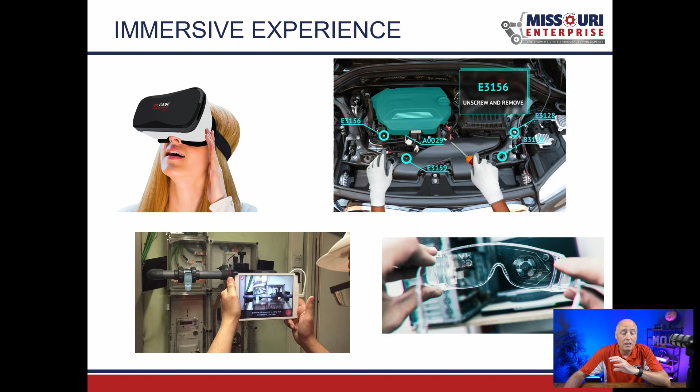Imagine Google glasses, they were big a few years ago. Now imagine a pair of safety glasses with a camera built in, and a technician needs to work on an engine. He puts on these glasses, says, I'm going to work on this model of a vehicle, and it tells them, okay, if you're going to change this part, unscrew E3156. So it uses the glasses to show you exactly what you need to do.

Big data. In the past, we didn't collect a lot of data. Manufacturers didn't collect a lot of data, except if you were maybe in a medical field. But if you want to collect information like the temperatures, the humidities, who worked on what part, where the supplies come from, you can gather all that data now and store it because storage is cheap. And it's very easy to put sensors on things so you can gather that information.

So years from now, you start having problems with a product that you sent out the door, and you can do some research and say, hey, you know what? When the humidity was over this or below this, we had problems with the paint. So then you can go back and figure out which parts you made, what day, what serial numbers you made and had that problem, and you can be preemptive and solve it.

Cobots, robots, we're going to be talking about that today. Two very important things I want you to listen to today about the cobots and robots. First of all, look at that picture. There's no guarding around that robot. In the past, when you would go into a factory, there'd be a robot, there would be guards, there'd be cages around these things because they could literally kill you because they're such big, heavy equipment. That isn't the case anymore. You can work right next to a person.

The second thing is programming. It used to take weeks, months maybe, to become a good programmer in robots. Now it's very simple to program these cobots. And a nice thing about being simple to program, you can move it from one station to the next very simply. Some of our clients are putting cobots on carts and just moving them around the plant as needed.

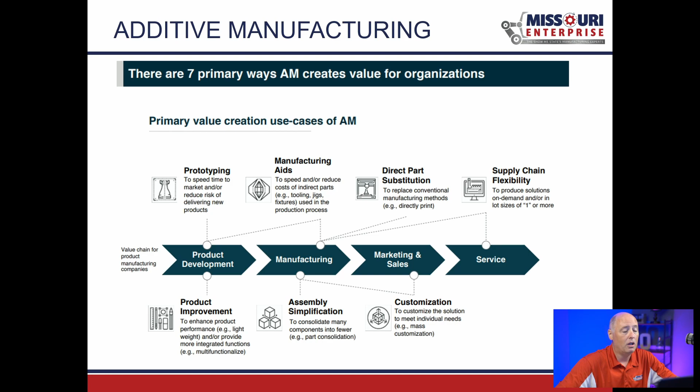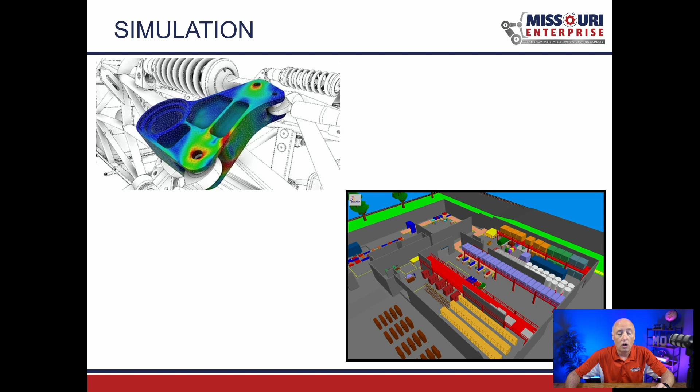Simulation, we're talking things like simulating the plant layout. So you can see how your plant would be different if you laid it out a different way, what that would mean to your production, what that would mean to your plant flow, or even simulation as easily as finite element analysis to see when a part is going to fail.

Cloud computing. This is something that was not really big, and then this thing called a pandemic hit, and people needed to work from home. So they needed to get access to that file that's on the server at the office. How do I do that? Well, now we start using cloud computing. That's simply things like Box and Dropbox and ways to access your information from afar, from a remote location. So you can approve that contract while you're waiting in the airport for your flight. It makes the world a little easier for manufacturing today.

Internet of Things, that's a connected plant. Imagine you have a piece of machinery that does inspections near the end of the line, and it sees that another machine upstream of it is making parts that are a little out of tolerance. So the inspection machine can talk back to the other machine and say, hey, these tolerances are out, move the tool a little bit closer this way, or maybe you need to change the tool. It can also communicate with your maintenance department, say, hey, our cutting fluid's about to wear out.

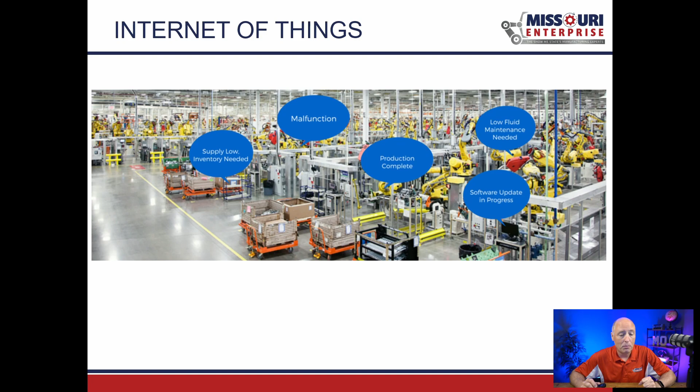So a connected plant is very simple if you can get the machinery to talk to each other, and that's what we can help you with. That's the first major step you need to take.

System integration. This is the ultimate, if you will. A consumer goes onto your website, orders your parts. It talks to your ERP system, MRP system. It schedules the manufacturing. It orders the parts from your suppliers.

It gets the parts made, and as it's being made, it feeds back to the consumer and says, hey, your part is going to be late because a circuit board is not available. Not that that would ever happen, but let's say in this instance a circuit board is unavailable. So now you're saying, okay, Mr. Consumer, your part will be delivered on this date rather than the original scheduled date. And it can even go schedule the truck to deliver it. So this is a complete integrated system, and everything is connected.

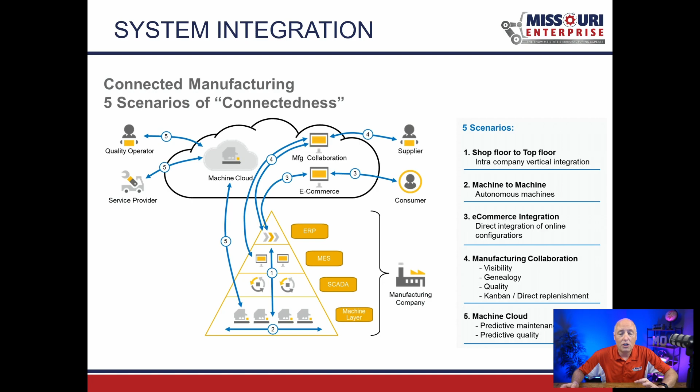And finally, the umbrella that covers it all, the armor to protect it, is cybersecurity. I talk to clients occasionally and they'll say, well, cybersecurity isn't that critical for us because we don't have anything classified, nothing technical we need to guard. For the most part, 99% of the time, cyber criminals are not going after your technical information. They're going after your list of who works for your plant. Imagine what you have on your computer: everybody's name, address, phone number, social security number, and chances are their bank account number because you give direct deposit. That's the kind of information you need to protect, and that's what criminals are trying to get to.

So we can help you with cybersecurity.

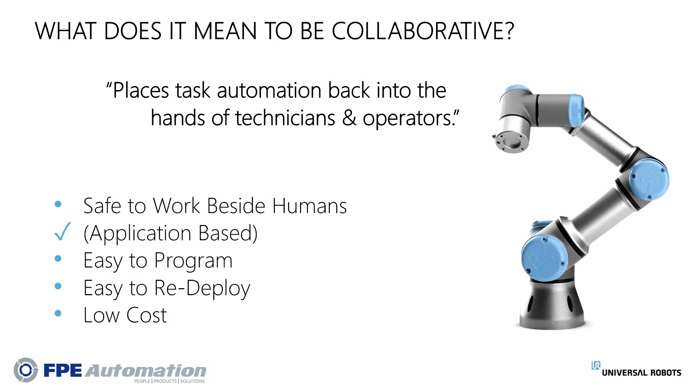Last but not least, it's low cost. All the features I've mentioned above attribute to this, and we typically see a very attractive ROI for these robots. I'll get more into detail with ROI and costs a little later in the presentation.

So my presentation today will be split into two distinct sections. First, I'm going to focus on the why. Why do collaborative robots exist, and why are so many companies moving in this direction? And then second, I'm going to focus on the what. What is the technology and how can it impact your company?

So first off, we understand that things are changing. I think everyone in this meeting can agree that manufacturing is changing very rapidly, and very few of you are doing your processes the exact same way today as you were 10 years ago, or even 5 years ago, or even last year. In this world, we have to adapt to changing work environments to stay competitive, and collaborative robots are a main factor for a lot of people who have chosen to close this manufacturing gap.

I would assume the majority of you watching this webinar do things a little different than the next guy, but I think a commonality would be the high mix, low volume in the manufacturing force. This is something traditional robots do not lend themselves to. Traditional robots are typically built for high mix, or high volume low mix applications, which are more of that fixed type automation you see in automotive and larger manufacturers with that cookie cutter product. They don't lend themselves well to meet the demand for manufacturers with small volume and high changeover, and collaborative robots are really helping fill that gap.

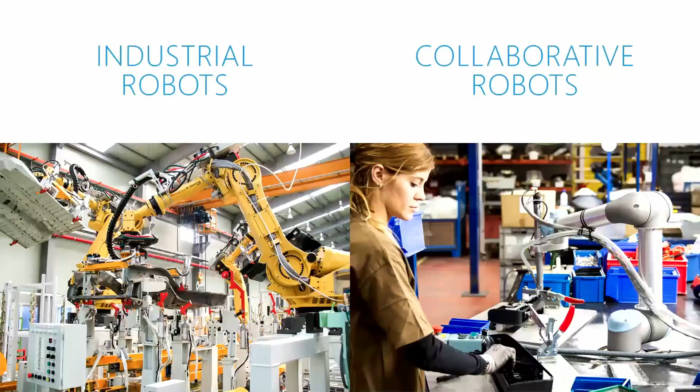So we are also changing the face of manufacturing, and this is how collaborative robots are doing that. Typically when you hear of robot, you think of an industrial robot, similar to the image on the left of the screen. These robots have been around for nearly half a century now, and traditionally only lend themselves to work in fixed automation environments that are doing the exact same thing 24/7, 365 days a year for years on end. This is why industrial robots and collaborative robots do not typically compete with one another.

They each have their own uses in their own respective areas. With that said, there are not a lot of SMEs that manufacture this way. This is why we're seeing a large shift in the amount of manufacturers going to the cobot route, like the image on the right. They can be used in a much smaller environment and used as a tool by your employees to get more out of their 8, 10, maybe 12-hour day. They're really filling that gap that has gone unfilled in the small to medium-sized manufacturing environment for some time now. They can also help set the pace and increase output, because the robot is always going to be waiting on that person - so the quicker the person can do their process, the quicker the robot can go.

So how do the two differ? Manufacturers have been working with industrial robots for a long time, and they certainly have their place, but there are some key points that separate the collaborative counterpart.

Number one would be the difficulty in setup and programming. Industrial robots are a little cumbersome, and you need to be a skilled robot programmer to leverage their full capacity, or have multiple days or even weeks of training under your belt. Universal Robots have changed the game to allow anybody to grab the teach pendant, just like you would a tablet, and put together a simple pick-and-place program on the robot.

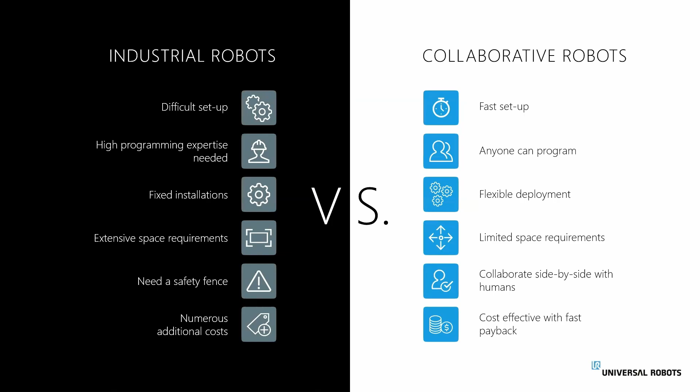Space will open up on your floor because you no longer have to have safety fencing with robots dedicated to a certain area and people dedicated to another. Now you can utilize all of your floor space and have the two really mesh together. And there are also numerous additional costs, which we'll talk about here.

So if we're looking for a 10-kilogram industrial robot versus a 10-kilogram collaborative robot, the costs are relatively close together—there's not much difference between the two. But when you step back and look at the total cost of ownership, you'll see the hidden costs in a traditional system versus a collaborative system.

So we've got the robot hardware, of course, but we also have the end-of-arm tooling. Every robot is sold with a blank wrist, like the one you see on the top right—there's nothing on the end of the arm—and it needs some sort of end-of-arm tool attached to accommodate the application you're trying to automate.

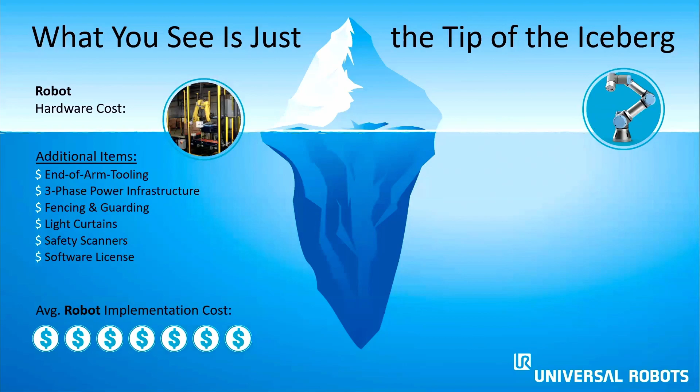There's also different power requirements. Industrial robots generally run off 3-phase power. There are some smaller industrial robots that run off 110, but all collaborative robots run off 110 volt, so you won't need to call an electrician for any drops—and that's an additional cost. Fencing and guarding, light curtains, safety scanners, software licensing—all these things add up to an extremely cumbersome and expensive robot deployment.

With Universal Robots, you do have your hardware, and you also have additional items like end-of-arm tooling that'll be plug and play. Then you have teaching—instead of programming or trying to integrate, depending on the application, you can teach the robot how to do the application you purchased it for.

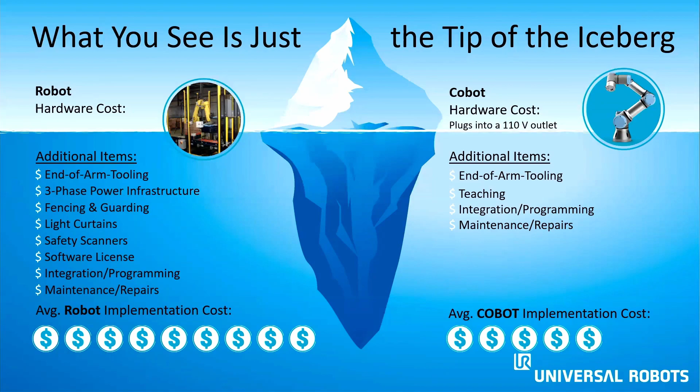Now, in some instances there is integration and programming involved—we typically see around 50%, it just depends on your application, whether it's DIY versus integration programming. Then you have some maintenance and repairs, but there's no grease or anything like that—it's just preventative maintenance, making sure dust doesn't get into the seals of the robot and the control box, and that the vents stay clean.

So now that we've looked at collaborative robots and why people are going that direction, let's see where they're being used. Some of you may have seen collaborative robots on YouTube or at a trade show, but really, how are they being utilized on a factory floor?

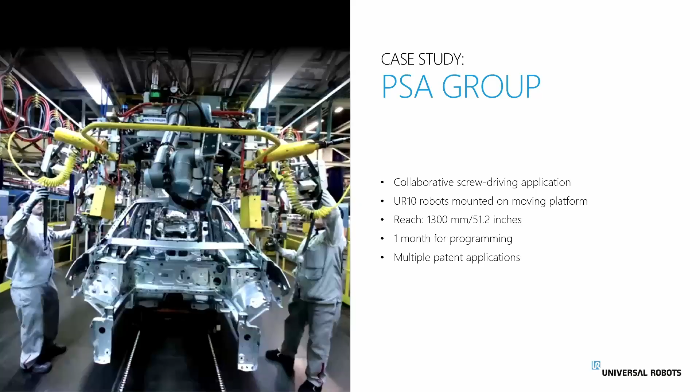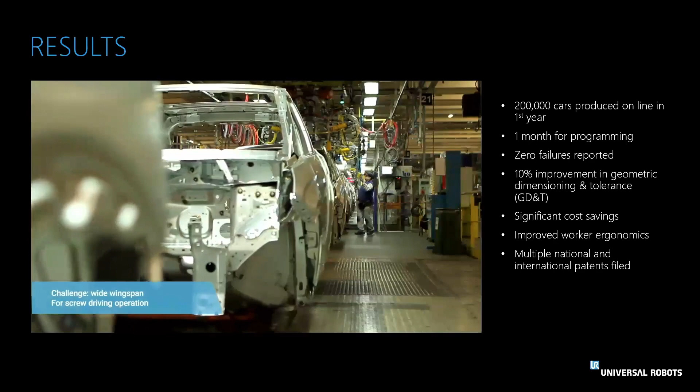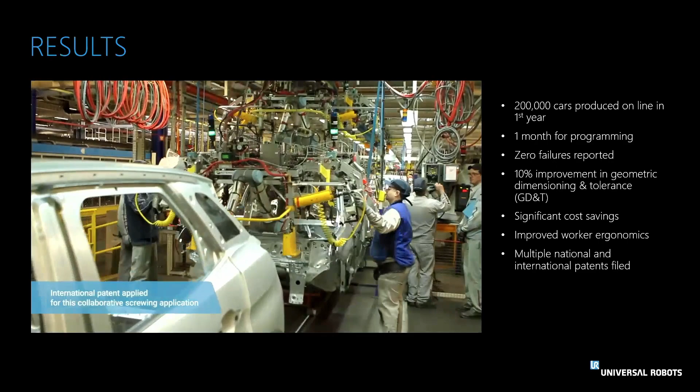Here's a video of an automotive manufacturer using cobots in place of a human who would otherwise be in a manhole or on a creeper all day, screw driving inside that wheel well. Notice how the robot's mounted to an overhead gantry that comes down and locks onto the chassis of the car. By adding a Universal Robot to this application, they not only improved the ergonomics, but also added automation that hits on the 3Ds of automation.

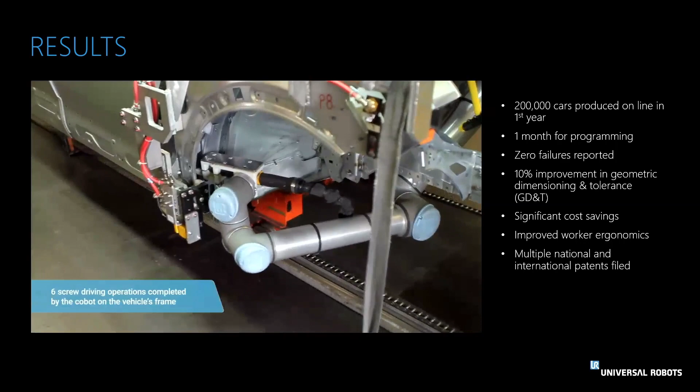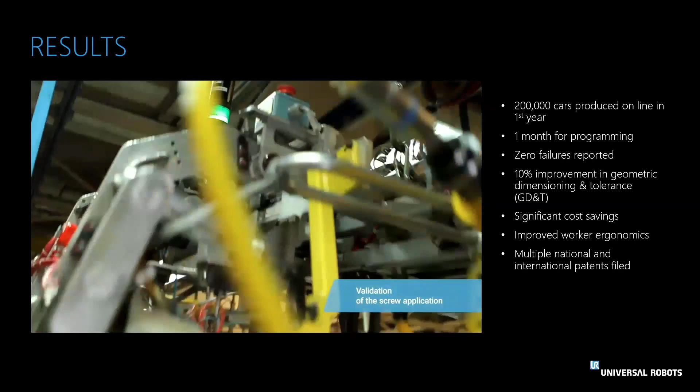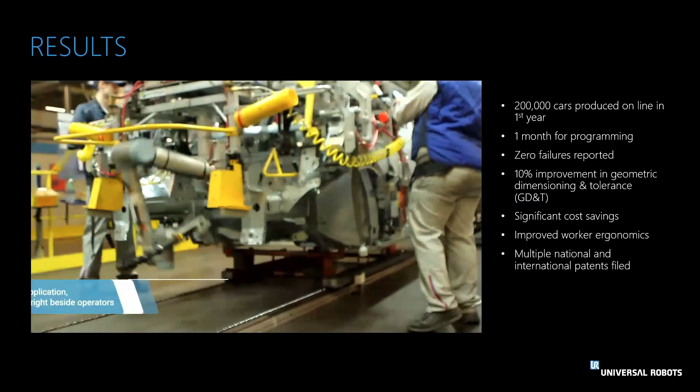When I say 3Ds, this is what we typically look for when we go into a facility, trying to figure out what's the low-hanging fruit to automate. Is the application dull? Very dull. Doing this repetitive task 200,000+ times a year would be taxing on just about anybody. Is it dirty? I think being on a creeper all day, or in a manhole of some sort, could be a very dirty job. And is it dangerous? Yes, it could be extremely dangerous depending on how it's set up for a person to be in there.

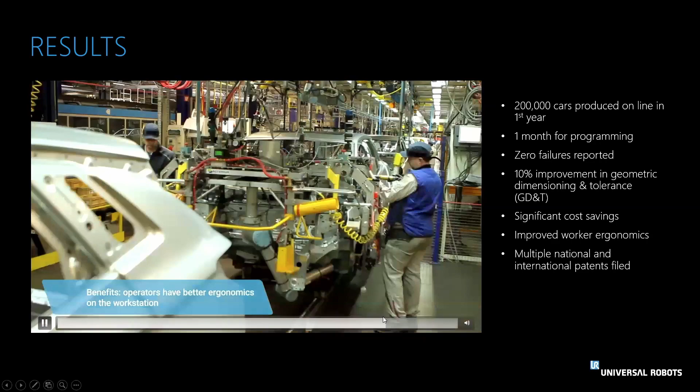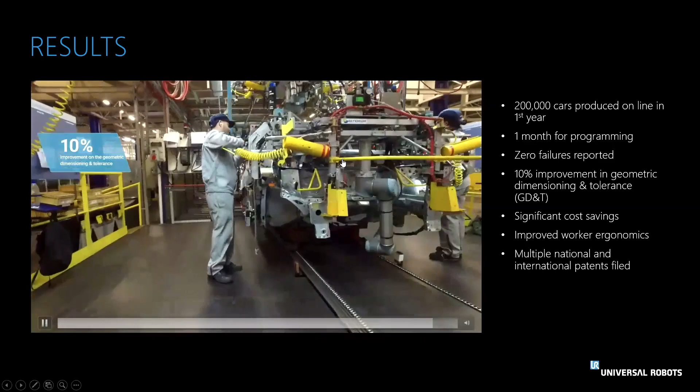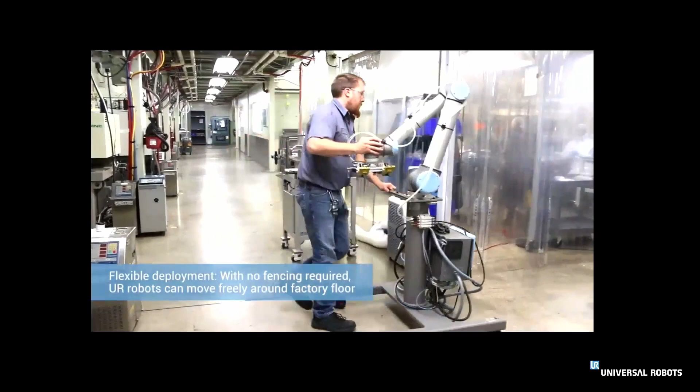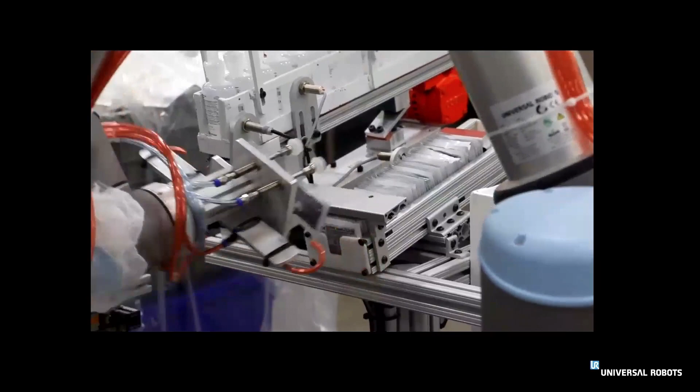This next one highlights some of the things I've mentioned earlier about putting a robot on a cart and moving it around a facility from job to job. Because they're lightweight, the heaviest one's about 75 pounds, they can be moved and mounted almost anywhere. Dynamic Group has really taken advantage of that. They're a contract manufacturer out of Minnesota, and they've mounted a UR on rolling carts and move it from one process to the other just as demand dictates.

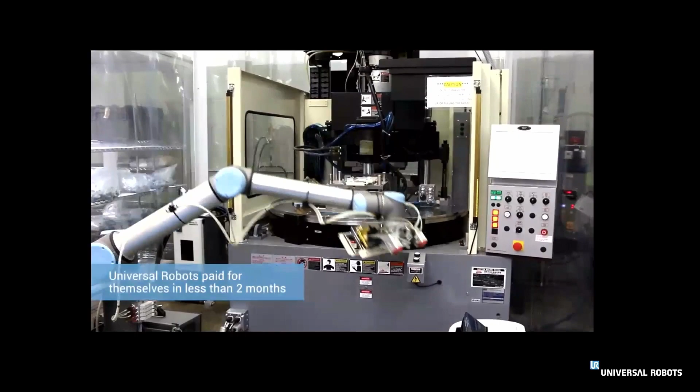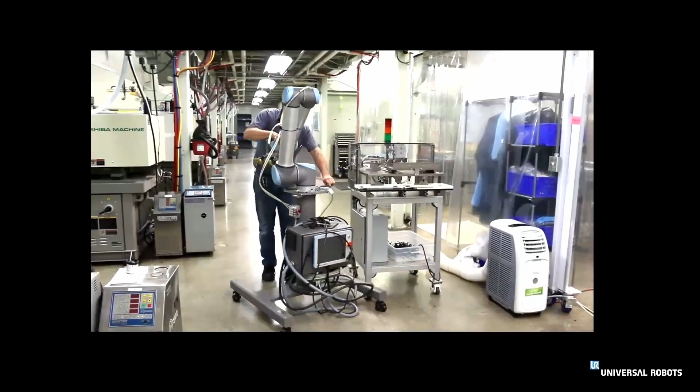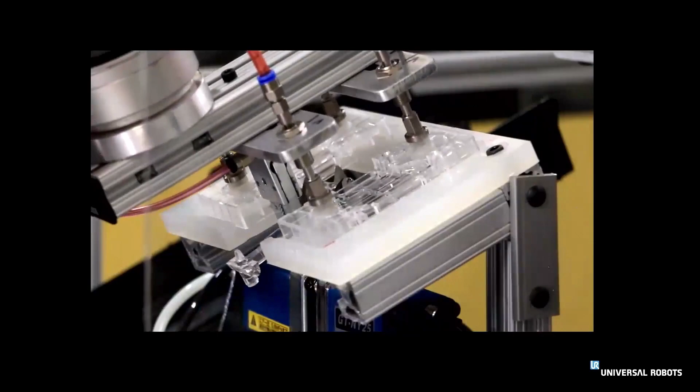In this case, it's going from a kitting application to tending an injection molding machine to a degating application. This flexible deployment supports agile manufacturing and demands for high mix, low volume, and custom processes. You can easily move, redeploy, and adapt them to new processes or product lines with easy programming and a full ecosystem of peripherals that we'll get into in a little bit to support almost any application.

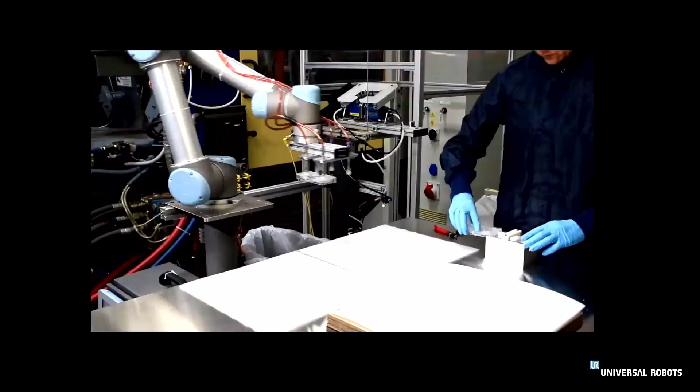You can also save programs to reuse if you have cyclical demand, and most processes are order-based. But if you have one that only runs every 3 months, every month, or even every 6 months, the program is always going to be in that controller, and you'll always be able to pull it up and restart it within a matter of minutes.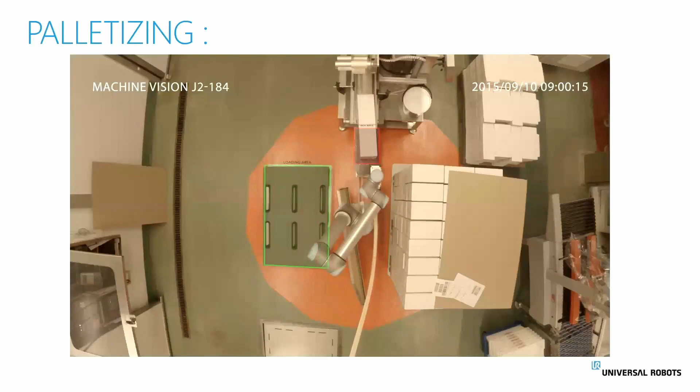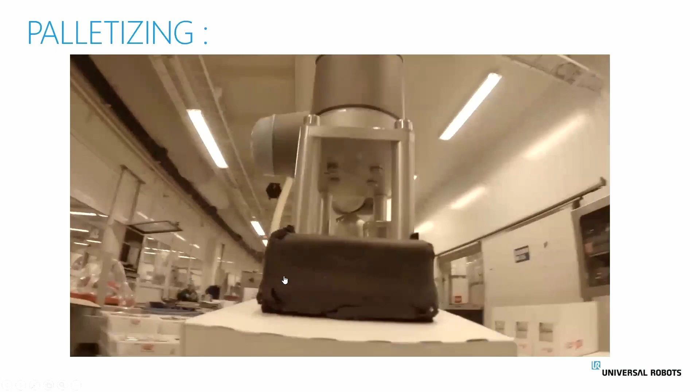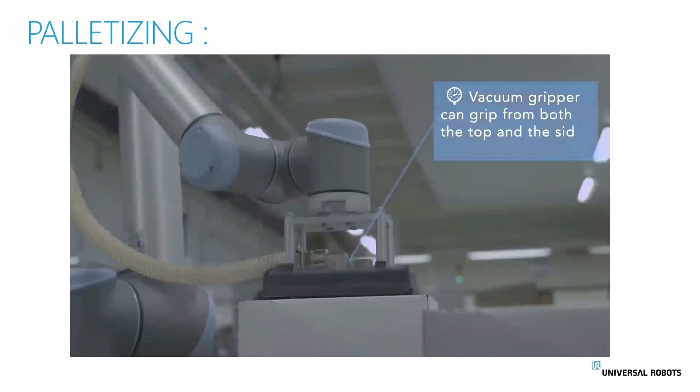One of the UR Plus partners, Robotiq, makes an entire system with a 7th axis. This particular one doesn't show the robot on a 7th axis, it's a fixed base. But what I mean by 7th axis is a pillar that lifts up and allows you to stack your boxes, say, 80 to 95 inches tall, so you can completely repurpose a person who would otherwise be doing this all day long.

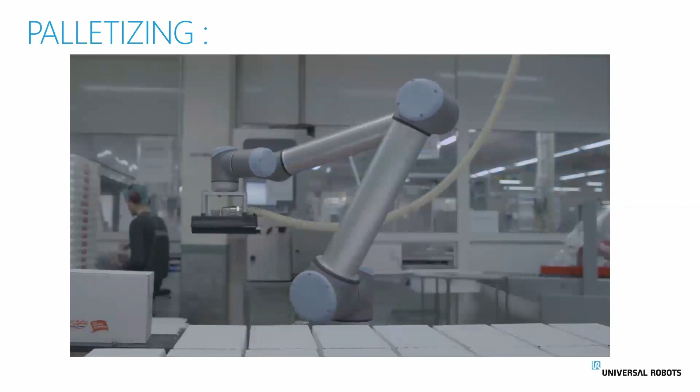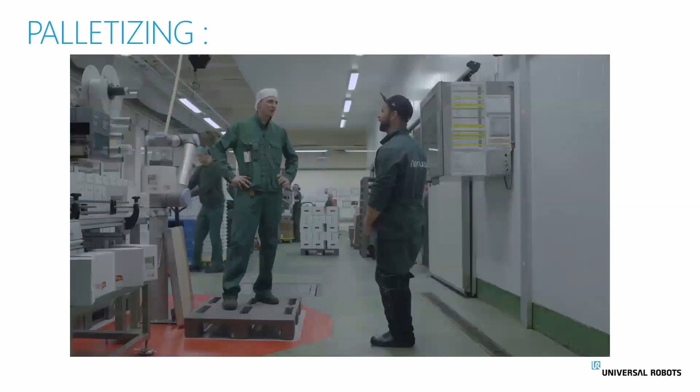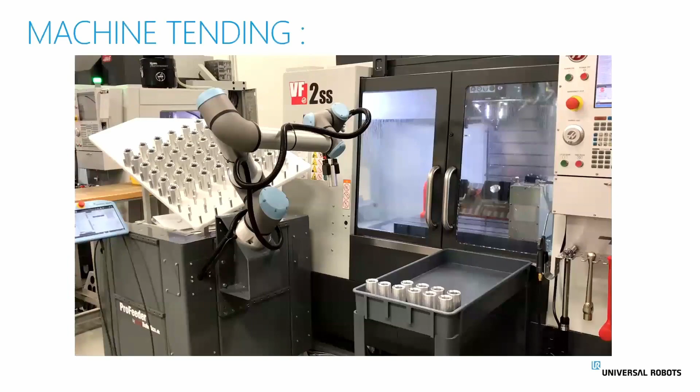And then we have machine tending. This is another really popular application with a really good ROI, averaging around 10 to 12 months. As you can see in this video, there's a couple different things going on.

The robot is opening and closing the door. We can do this a number of different ways: with an auto door opener, which is fairly expensive, or by adding a pneumatic cylinder to the door, having the robot send a signal to open and close it when the process in the machine is done. You can also see this robot has little grippers to help increase cycle time.

It'll grab the blank and have it ready, and once the part has been cut, it'll pull the cut part and place the blank without having to go back and pick a new one, then close the door. In some of these applications, the robot is actually pressing the start or cycle start button, just like a human would.

Yeah, it is. So you can also see that it's on a stand called a ProFeeder. It's a mobile stand that you can lock in, either to your machine or into the floor, and it's got that pegboard type thing sitting on a 45-degree angle. This is nice if you have multiple different parts, which most customers do. You can switch the pegs out to hold different parts and use this for multiple different applications, not just one specific part.

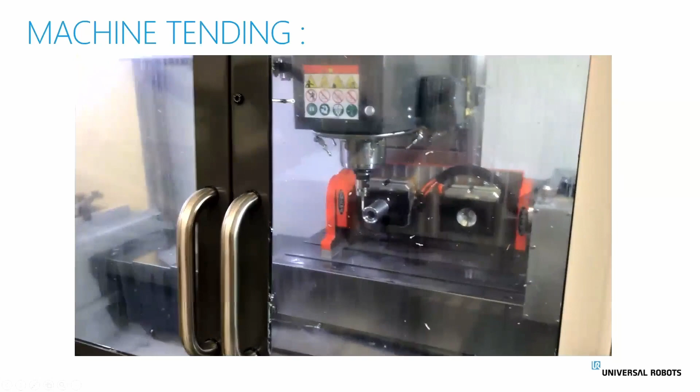That's kind of just going to show it waiting now, but the next one is quality inspection. So I'm going to be quiet for a little bit and let you watch this whole case study here.

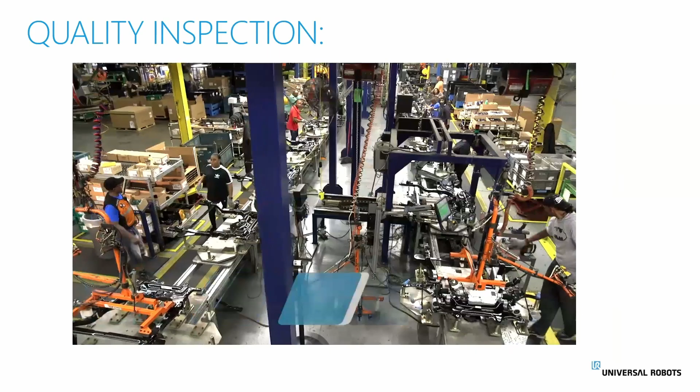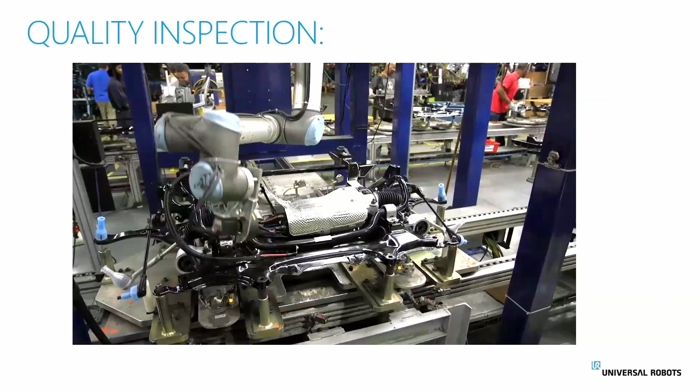Comprehensive Logistics is the number 1 logistics and contract manufacturing provider to two of North America's largest automotive enterprises. The Ohio-based company runs fast-paced suspension, powertrain, and interior component assembly lines, leaving no room for error. Our customers speak quality constantly, and when they come to us, we speak the same language. Everything is just in time, just in sequence, and that's what we do as a company.

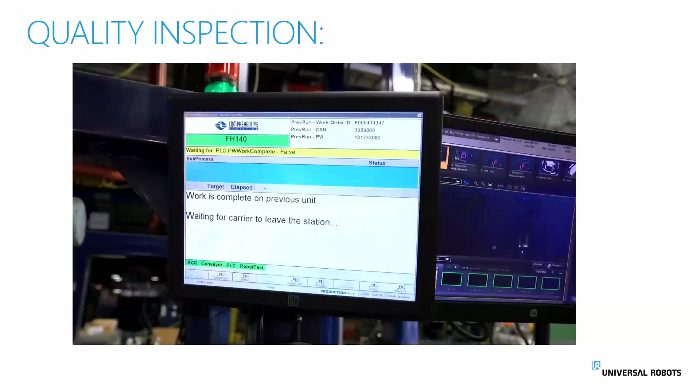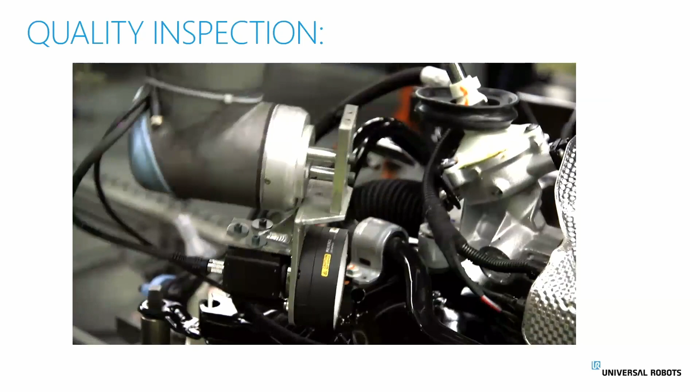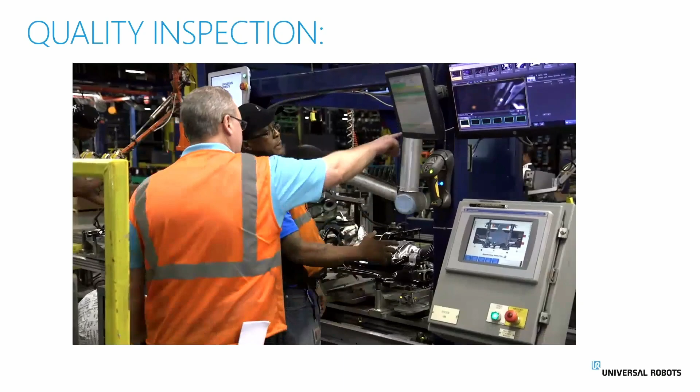Comprehensive Logistics has one subassembly operation where the final check of quality required us to validate that an electrical connector was locked in position. We had a system in place before with stationary cameras that served a purpose, but they couldn't get into some tight spots. They weren't nearly as repeatable.

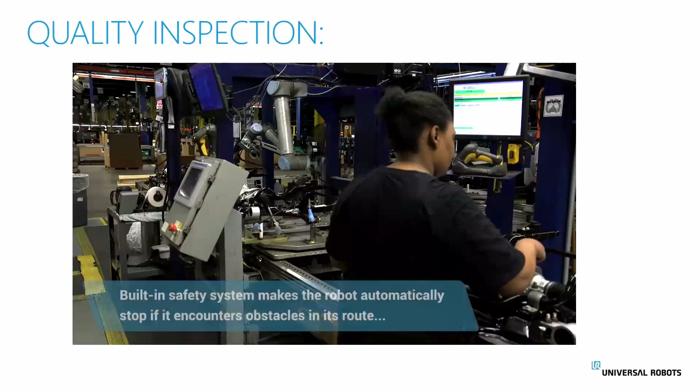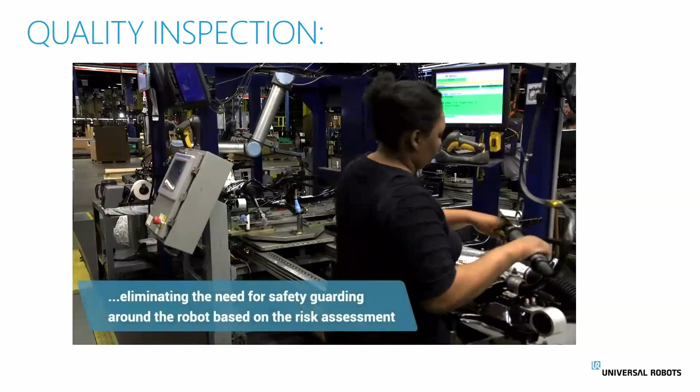Universal Robot because it gave us a personalized system. It was a lightweight system that interacted well with humans. We didn't need to have the cumbersome light curtains that are required with some of the standard robotic systems in the industry. The inspection, if done by a human, is about 80% efficient, so Universal Robot provided us the opportunity to strongly position ourselves and get 100% quality.

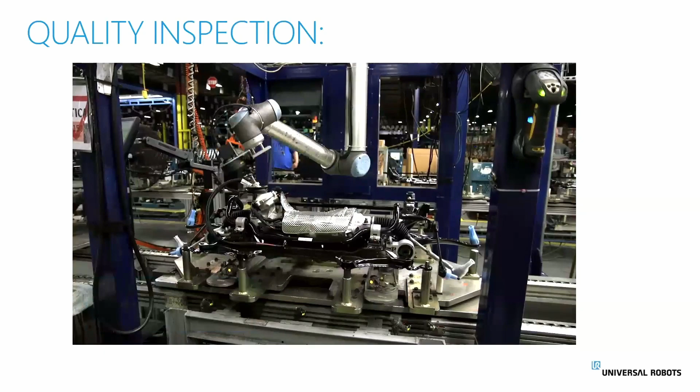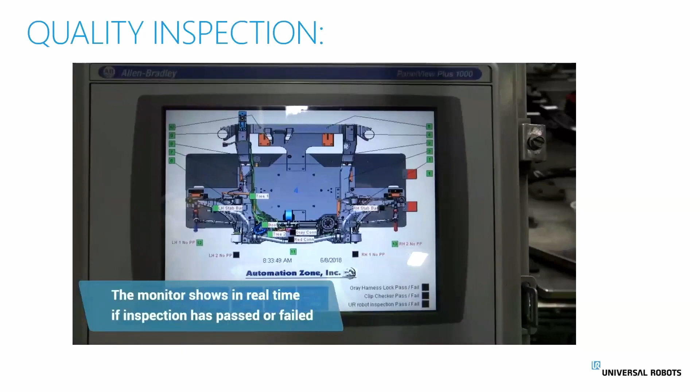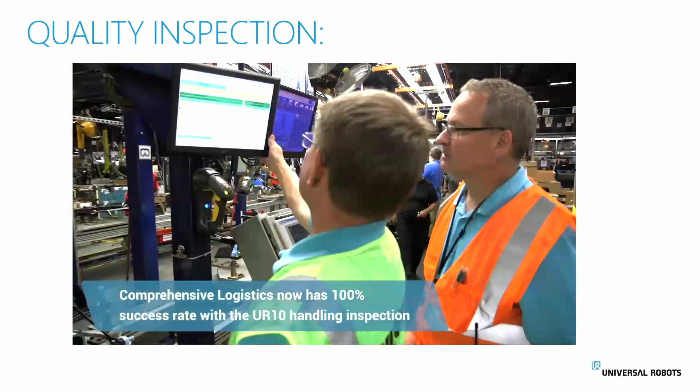The dexterity of the Universal Robot is such that it can get pretty much anywhere on that assembly that we need to get. There are two plugins for the wire harness, and they have two locking devices. If there is an intermittent connection, or it's not connected and locked into place, it is a loss of power steering, which puts the operator of the vehicle in danger. It's a life-threatening failure mode, so we need to make sure 100% of the time that those clips are locked.

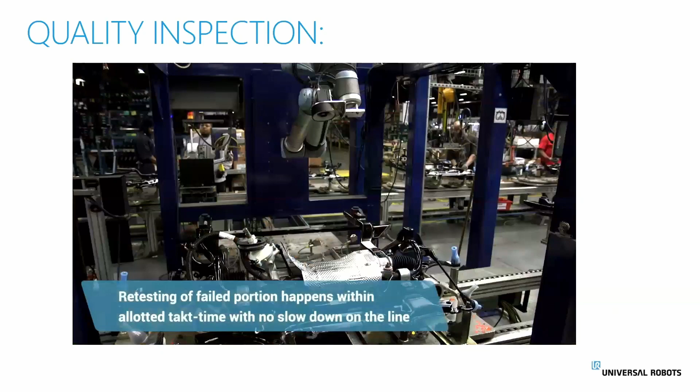If the inspection fails, you are able to interact with the Universal Robot and go in and fix the issue. The return on investment is probably about 7 months. We had a turnkey operation that obviously had an integrator included. The payback for the hardware for Universal Robots in itself would probably be less than 4 months.

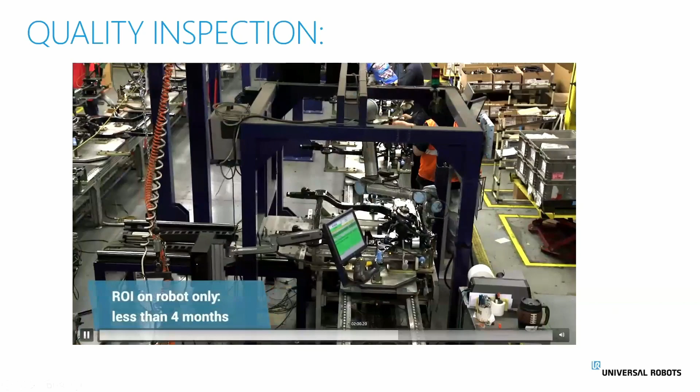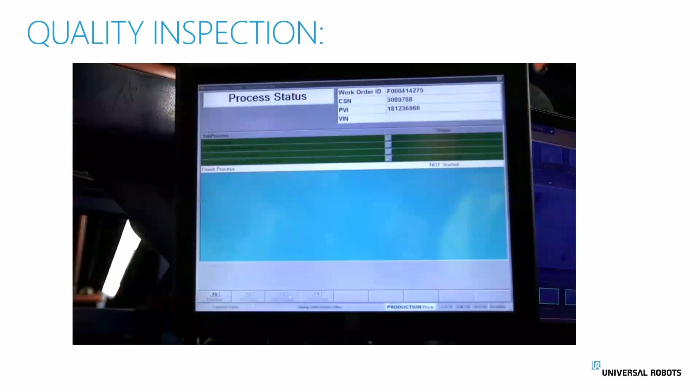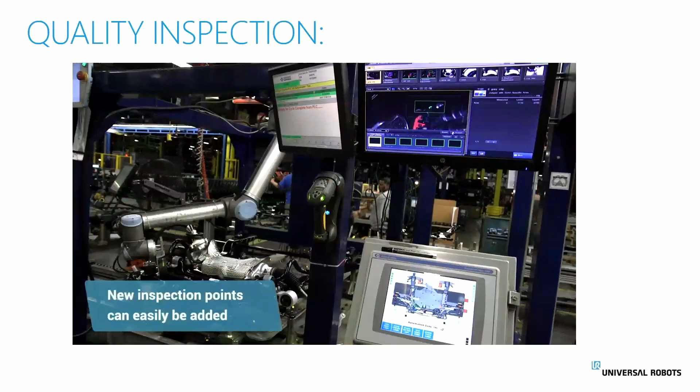We have not had any issues with the robot since its implementation, aside from possibly adjusting some of the images on the camera, unrelated to the programming of the robot. The Universal Robot provides Comprehensive Logistics real-time, quick-change ability. If new requirements were given to us by our customer, or different inspection criteria, it's very easy to add inspection points to the process.

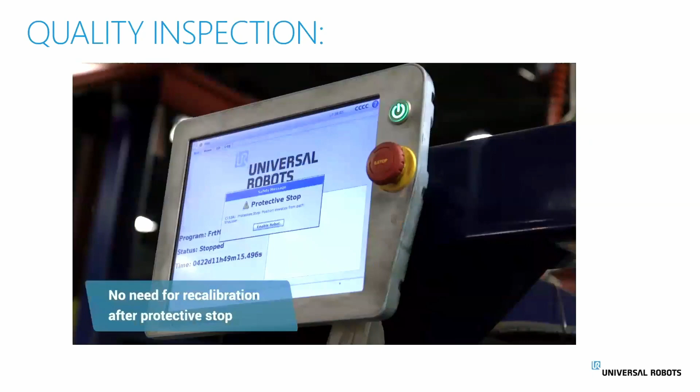If we lose power in the facility or there's some blip, even if it's interrupted by human interaction, you basically just need to reinitiate the robot and start it, and it continues from its stopping process. We could potentially replicate this process on other lines if the customer has mission-critical inspection points that need to be 100% quality.

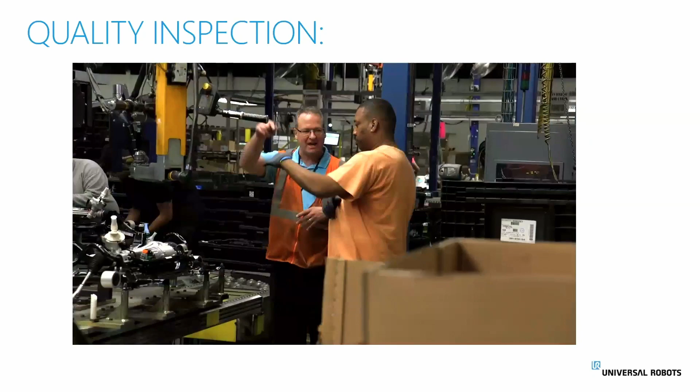It's like family. It's here before I am, during the day, and it's here when I leave. So, I mean, it's a part of the system. We just take the robot on as another employee, basically.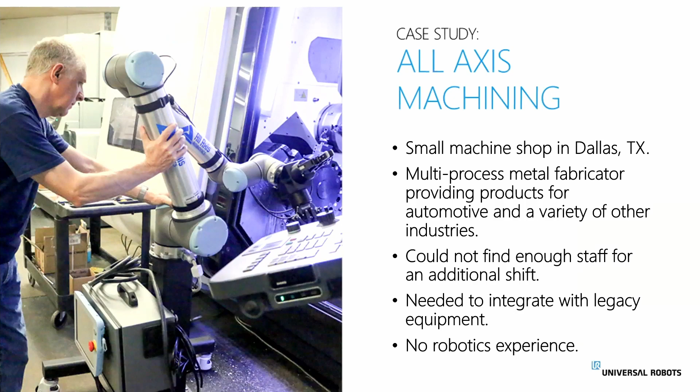So now that you've seen some of the videos and case studies, I wanted to talk through a quick example of a small company in Dallas that has had great success with Universal Robots. They were having issues with finding and retaining staff, like I would assume most of you are. This was causing them unnecessary downtime and having to turn down work due to staffing issues. With no robotic programmer on staff, they were able to get trained through the Universal Robots Academy, which I'll explain here in a little bit, and automate their first job within 2.5 months.

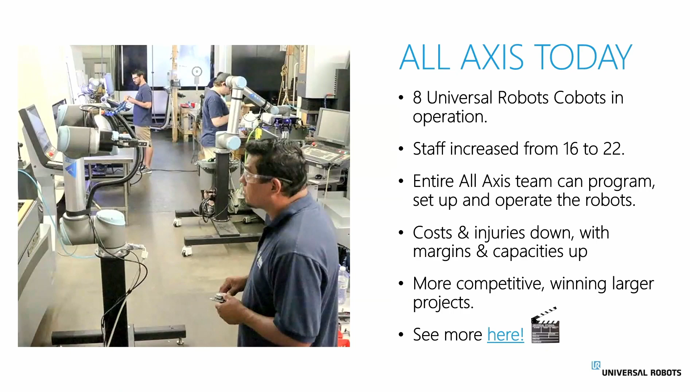This gave them a 60% increase with a 4-month ROI, and it also increased their spindle up time from 8 to 20 hours a day. Today, they have a total of 8 Universal Robots in operation and increased staff from 16 to 22 people. The entire team is trained on how to program and make small changes to the robot. Not only that, they are more competitive and now winning larger projects because of what they've decided to automate and how they've decided to move forward with business.

So robots versus labor. The question is, are robots taking everyone's jobs? The reality is it's not in the slightest the truth. We go into a number of different manufacturing facilities daily, and they can't find enough people for the jobs. So it's really becoming a necessity for companies to fill these positions with robots because they can't find enough people to do it, and they still have to operate on a day-to-day basis.

In a recent study, executives reported that they cannot even fill higher paid entry-level production positions, let alone find retained skilled workers for specialized roles. It's looking like it'll be a long-term challenge for about 77% of manufacturers trying to find and retain workers in 2021 and beyond.

Everything I'm currently going over was already an issue before the pandemic, and it's since worsened. The hard data states that about 1.4 million U.S. manufacturing jobs were lost during the early days of the pandemic, setting back the manufacturing labor force by more than a decade. While the manufacturing industry recouped 63% of jobs lost during the pandemic, the remaining 570,000 had not been added back by the end of last year.

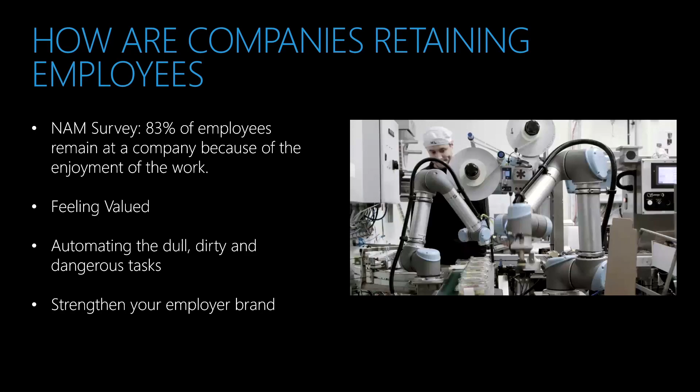75% of job seekers say that an employer brand is a deciding factor as well when applying for a job. And automating tasks can help really improve your employee brand.

So what's the solution? It's really no longer a case of if a business will embrace automation, but a case of when. Businesses that fail to automate tasks risk losing the best candidates and their best employees to companies that are looking to the future and trying to automate these dull, dirty, dangerous, and monotonous tasks, letting that person do a more rewarding job versus picking up boxes and stacking boxes all day long or whatever it may be.

So now that we've discussed the why, let's get into the what. What is this product? Universal Robots started out in an ideation stage between 2001 and 2005 by 3 professors out of Denmark, and they realized the need for a robot to fill the gap that we're all now seeing in manufacturing.

In 2008, the first cobot was developed, the UR5. And while the need for a larger payload and reach was still out there, fast forward a few years to 2012, and the UR10 was released. In 2013, we rang the bell at the NASDAQ Stock Exchange.

Then in 2014, we were certified by TUV Nord for the safety systems. The UR3 is one of our tabletop robots, launched in 2015. You had the 5 and the 10, which are a little bit larger. The 3 is more meant for tabletop assembly and things like that. Here in Missouri and Southern Illinois, we sell definitely a majority of the 5s and the 10s. The 3s have more of a niche space in the market.

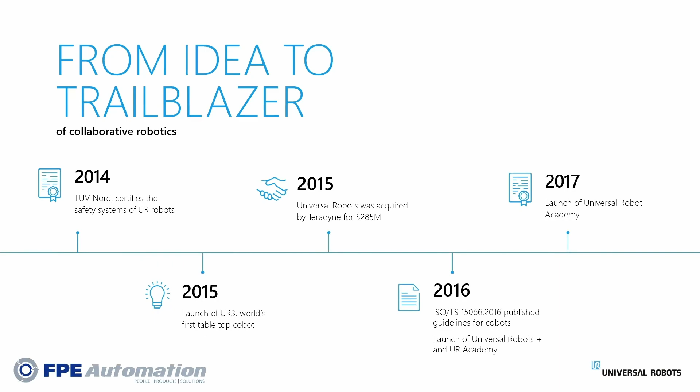2017, launch of the Universal Robots Academy, which is their online training courses. 2018 was when the E series was launched. Prior to 2018, it was the CB series — a CB2, CB3 — and then the launch of the E series at Automatica was in 2018.

Then 2019, the UR16 was put out, which is their 35-pound payload robot. And then in 2020, the first of its kind autonomous bin picking kit for machine tending applications was put out — 3D bin picking for any part products that you guys have in bins that eliminates the difficult challenge of feeding and presenting parts if the robot can just pick out of a bin of parts.

So when we look at Universal Robots today, the growth, and especially the staff growth, is very significant. We're in 20 countries, 29 offices, and 740 plus employees and growing. Still around that 50% market share with around 65 patents.

Currently, I believe we're at like 54,000 robots installed worldwide. It's been growing and growing tremendously this year. This year has been, due to the pandemic, a record year for Universal Robots.

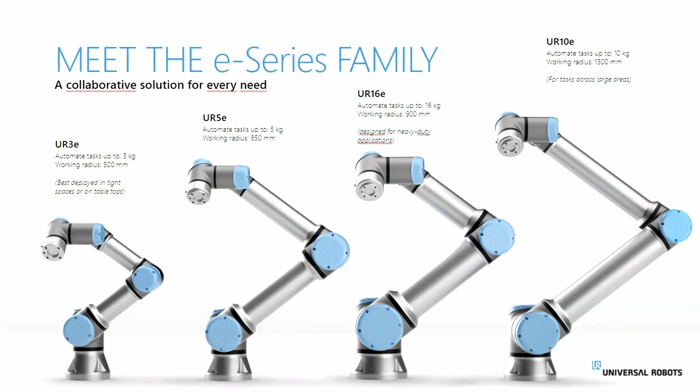So the new E-Series family — we say this is new, it's developed, still put out in 2018.

You see the UR3 all the way to the UR16 payload. The UR3 is mainly for tabletop applications, like I mentioned — assembly, screw driving, things like that. The 5 is pretty good for machine tending applications, welding, some palletizing, not much. The 16 is more for heavy duty machine tending applications. And the 10E is great for palletizing, great for machine tending.

This is one of our most popular selling robots, not necessarily for the payload — for the reach is generally what customers need, that 51-inch reach that the 10 kilogram has.

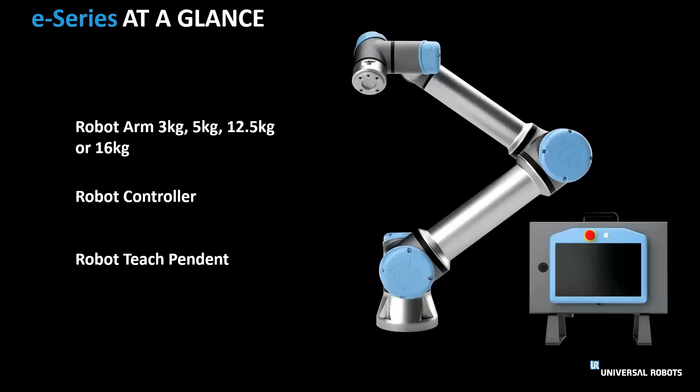So E-Series at a glance, showing the platform here. The robot arm is available in 3 kilogram, 5 kilogram, and now the updated 12.5 kilogram is what the 10E can do — around 27.5 pounds — or you can get the 16 kilogram. No matter what robot you get, it's the same controller and pendant.

I mentioned Universal Robots Ecosystem and Universal Robots Plus a little earlier. What that is, it's a platform with a number of different manufacturers on there. Some of them you can see here, Cognex, Schunk, ATI, and a number of other ones. I think there's probably 500 plus now working to get into the UR Plus certified products market. What this is, it's similar to how your iPhone or your Android has Google Play or the App Store — they make the phones and they do a good job at it.

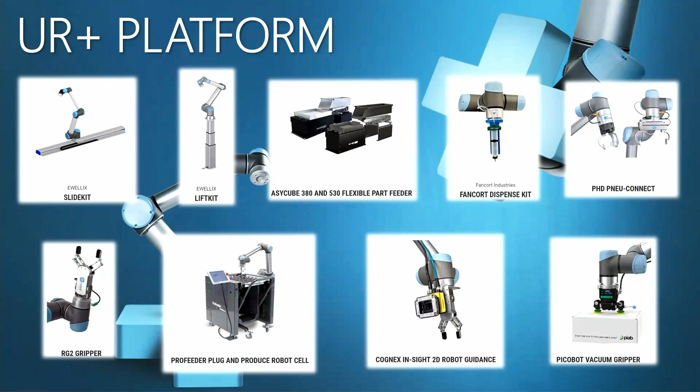Universal Robots makes a robot. They understand that's what they need to focus on, but they certify and vet companies like Robotiq, OnRobot, and Ewellix, and a number of others to develop the hardware and software to be plug and play for the end user. So say you purchase a lift kit for palletizing, it'll come with the hardware, but it'll also come with a flash drive that you plug into the pendant.

You can see the Ewellix software on there, and you can tell the lift kit to go to whatever distance, whatever millimeter increments you want, strictly through the pendant. You don't have to operate with any outside PLC or anything like that. It's not needed with this plug and play type of system.

There's also welding, which is very popular. Vectis makes an off-the-shelf welder, very simple to program, awesome for your high mix, low volume parts. Sanding, screw driving, there's a number of different applications. Really anything your application is, all quality control - there's not many applications out there that there's not some sort of UR Plus product or application kit developed for. So if you guys have any further questions on this, please ask, or feel free to contact me after the call.

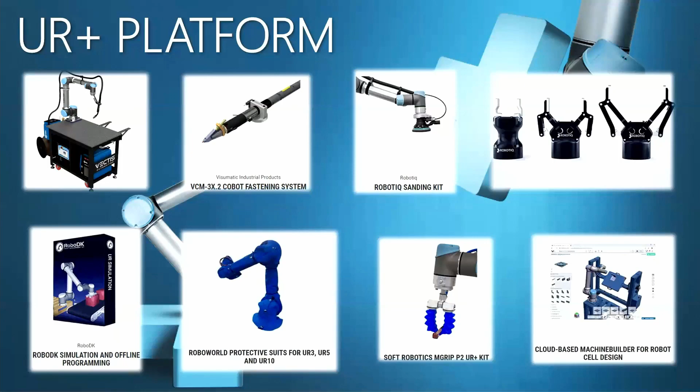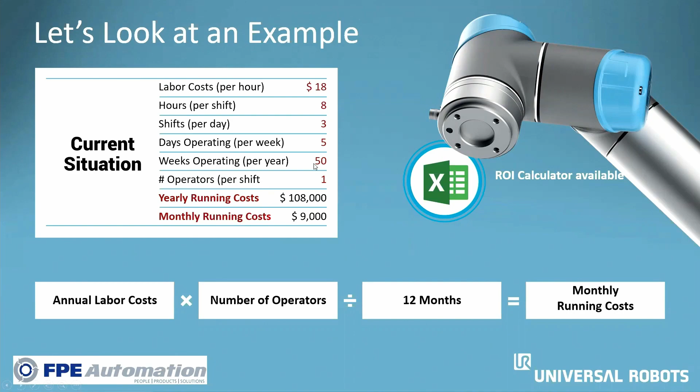They base this 14-month ROI on a 3-shift operation, but I'll show an example here real quick. So if you look at your labor costs, your fully burdened rate may be around $18 an hour - probably a pretty decent average for most of our customers, maybe a little low. Hours per shift, 8 hours. Shifts per day, 3 - some of you probably don't run 3 shifts a day, but you can see how this works. So yearly running costs around $108,000, monthly running costs is around $9,000. This is assuming you're going to replace or repurpose one employee off of this application.

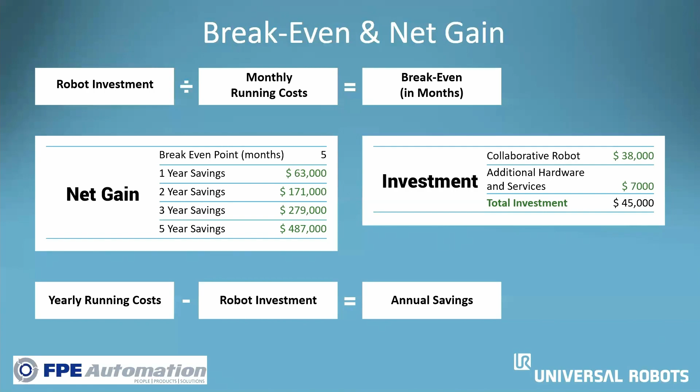So your break-even point with a 3-shift process is around 5 months. One-year savings, you're saving $63,000. Five-year savings is insane, around $500,000. Now say you had 1 shift, you're probably going to be around that 15-month mark. But even at that 15-month mark, you're still making money after that. You're not having to pay for this robot month after month like you would an employee, and you may be getting a better output, a lower scrap rate, reducing your workman's comp issues. There's a number of different things that aren't listed on this ROI that a lot of our customers do take into account.

So getting started - if this is the direction you all decide to go, I've mentioned the Universal Robots Academy. This is an amazing training platform that's free to use online. It's 87 minutes, there's a number of different modules. The one that will encompass everything and teach you how to use the pendant, teach some simple points, and get it to interact with sensors and conveyors is the 87-minute online academy. That's something you'd have to do before any additional training.

We also offer additional core training at our facility, which is a 2-day core class certified by Universal Robots, offered in St. Louis at our facility. There's also an additional advanced training you can get - the prerequisite would be the core training for that, and that's also 2 days. If you do that, it teaches you scripting and a number of other things that will definitely help you with the more complex applications.

So as you can see by some of the information I've shared, collaborative robots, when used in the correct setting, can be a very, very disruptive tool for manufacturers in any industry. If you want to know how this tool can be utilized in your facility to make your employees and company more productive, please feel free to reach out to us.